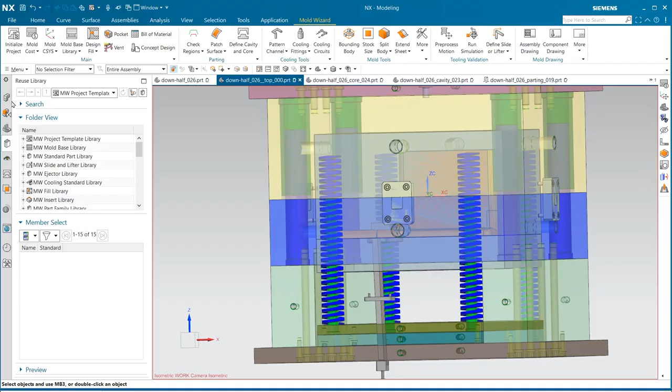In today's video, we'll show you how the June 2023 release of NX has made NX Mold Wizard even better. There's a range of new features and enhancements that will help molded part manufacturers automate and accelerate the mold design process. Mold Wizard is an NX add-on module that gives you a complete working environment for designing molds for injection molded plastic parts. It streamlines the entire mold development timeline, letting you automate time-consuming tasks and eliminate the repetition of standard processes.

Starting with the part file for the plastic product, you can validate the geometry for manufacturability and quickly make any necessary design changes before designing the mold itself. Modeling the mold's core and cavity geometry is quicker than ever thanks to extensive automation, and libraries of reusable standard parts make laying out the mold structure a breeze.

When it comes to manufacturing, associative design and full integration with Teamcenter mean a seamless transfer of data between teams. Whether you're 3D printing a prototype or multi-axis milling the final product, you can be sure that everyone's working from an up-to-date single source of truth.

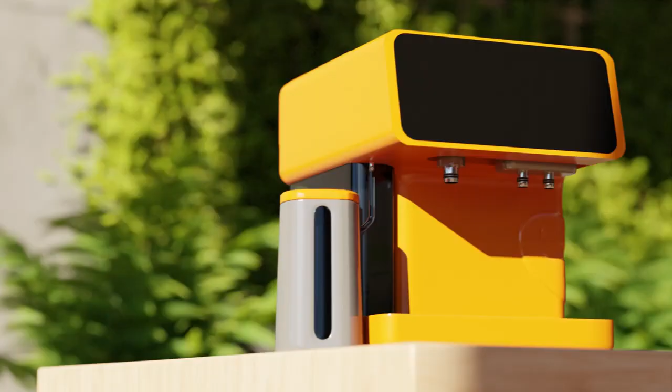This is the coffee machine that we showcased in the NX June 2023 premiere. The outer shell is formed of 4 parts that will be made from injection molded ABS.

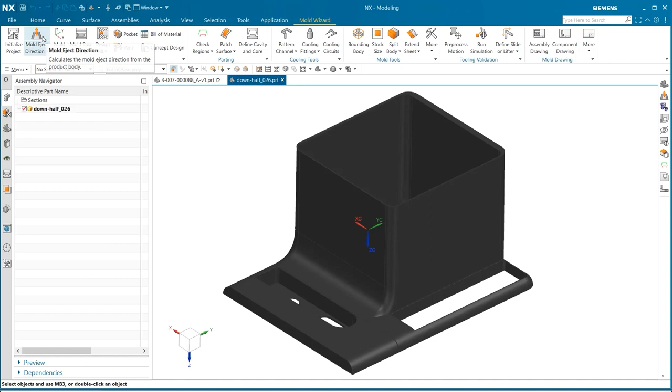The manufacturer is now in touch with a supplier to get the parts produced. That's where we'll pick up the story, as the supplier analyzes the part design, generates a cost quote, and designs the mold. The first step of analysis is to determine the mold eject direction. Simply select the body and adjust the orientation to get started.

If you toggle Perform Slope Analysis, the draft angles of different faces will show on the part for a visual check before we perform the command. Click OK and NX will automatically recommend the optimum eject direction for the mold. In this case, that's along the Z-axis, as shown by this blue line.

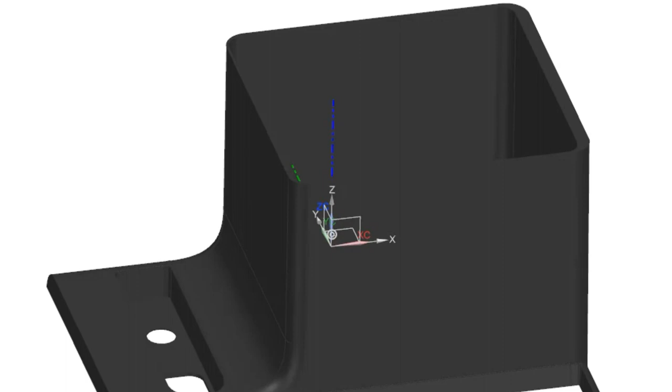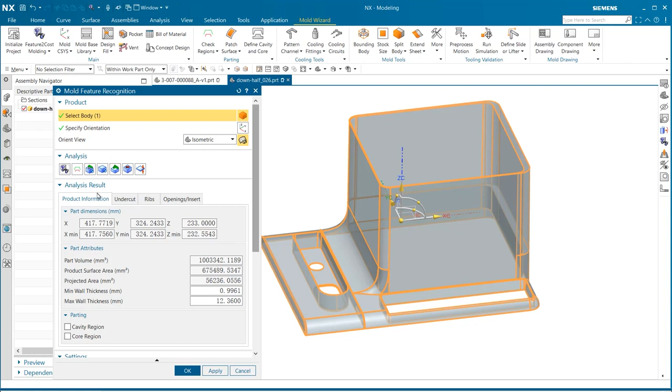Next, feature-to-cost modelling will automatically identify key information about the part and recognise important features that will affect mold cost. On the Product Information tab, we see figures such as the part dimensions, part volume, and minimum and maximum wall thickness. It will also analyse the part for any undercut areas, highlight them on the body, and show their dimensions. If necessary, you can quickly remove individual undercuts from the analysis.

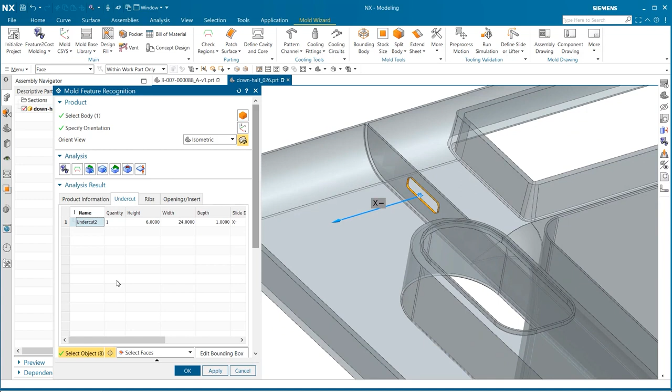We're not concerned about these two, but let's zoom in on the third. We'll need to account for this with a lifter or slider when designing the mold. You'll find any ribs listed in the Ribs tab, again with the necessary dimensions. This thin rib is likely to complicate manufacturing of the mold, perhaps needing electrical discharge machining. Lastly, feature-to-cost identifies openings that may require inserts during injection molding.

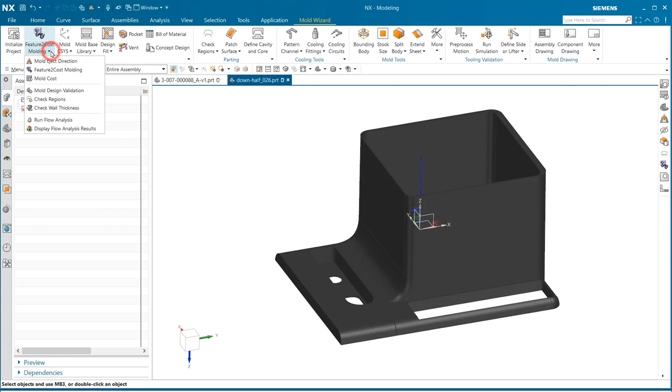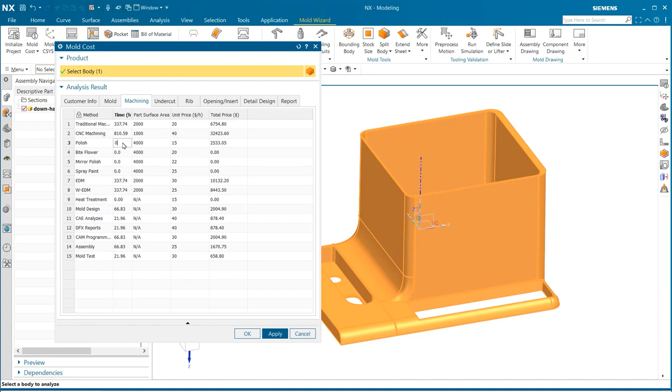With these features recognised, we're ready to estimate the mold cost and generate a report. There's a wide range of configurations that you can adjust based on your equipment, processes, and individual customer requirements. If we change the mold base material, the price updates accordingly. On the Machining tab, we see the costs of a variety of machining processes based on how long they'll take and a unit price for each. We won't be polishing this mold, so let's change the time value to 0. The total price will update automatically.

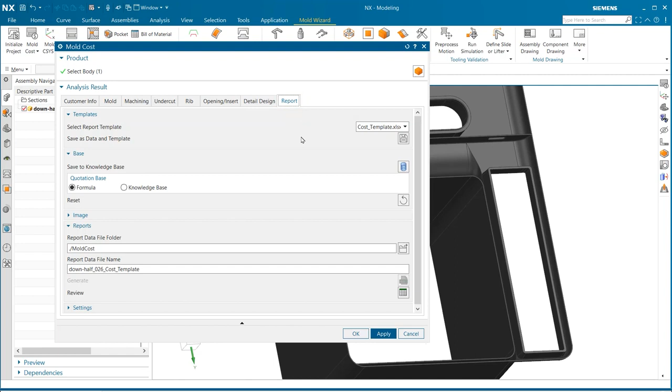All the undercuts, ribs, and openings that feature-to-cost has identified pull through into mold cost too. You can choose implementations and materials for each and see the prices update. Once your configurations are set up, it's time to generate a report. You can customize different templates for different stakeholders or use cases. Next, quickly choose and add reference images to the report direct from the NX viewport. No need to take screenshots and attach separate image files.

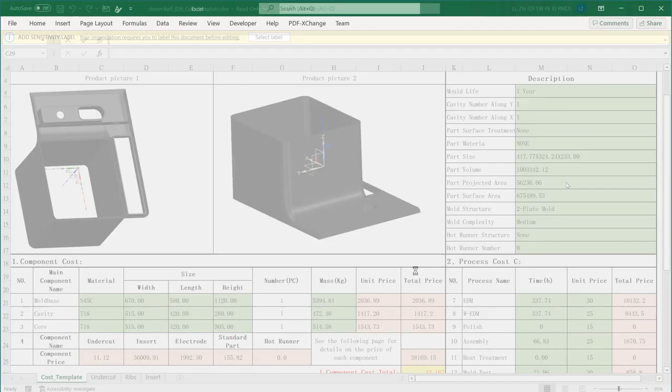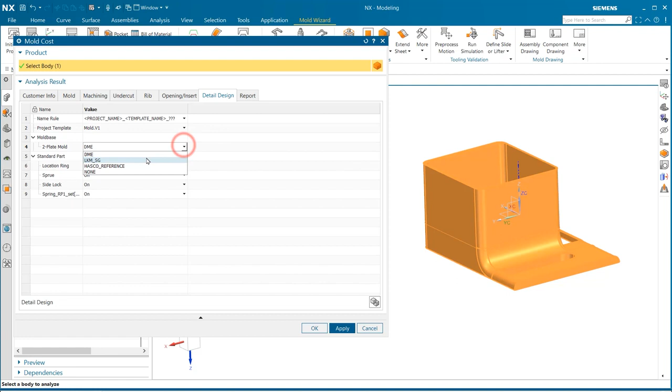Generate the report as an Excel file and click Review to see the output. This report includes a general part description, an itemized list of costs, and even tax information. With the analysis complete, we're ready to design the mold. Detail Design will automatically design a mold based on all the data from feature-to-cost and mold cost, including cooling, cores, cavities, undercut lifters, and other features. Just choose a project template, mold base, and standard parts, again, fully customizable, and click Apply to run the command.

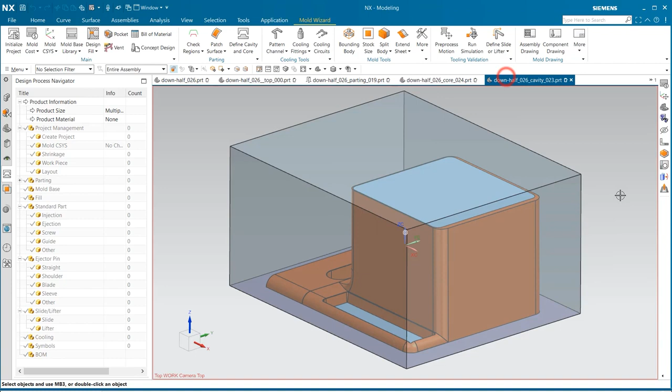You'll see NX speed through lots of different operations as it generates features based on the original part geometry and the specifications from mold cost. Once it's done, we can see that it has created separate part files for the core, the cavity, and the mold assembly. The mold assembly is fully featured with standard parts such as fasteners, guides, and inserts. NX draws these parts automatically from a standard part library which you can customize to match your own manufacturing operations. You can also quickly edit individual components if necessary.

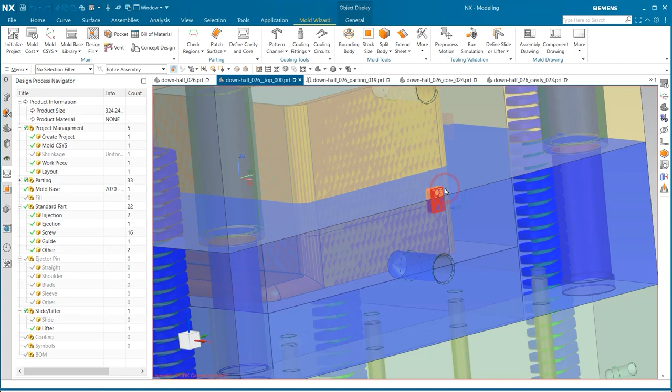Just select the relevant part, and Standard Part Manager will let you modify a range of values based on the options available in the library. There's even a helpful legend showing what each parameter controls. If we select the lifter for our undercut, there's a huge array of parameters to choose from, so we can get the geometry exactly right.

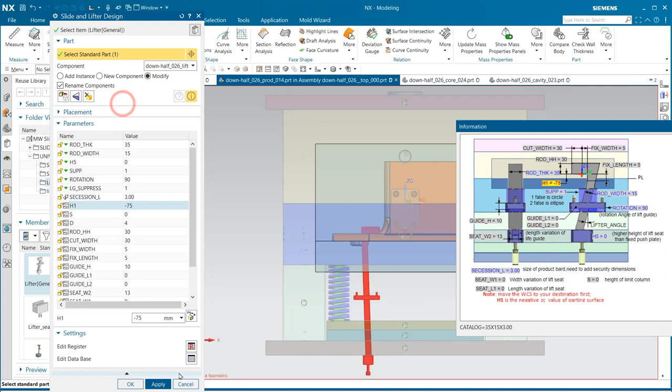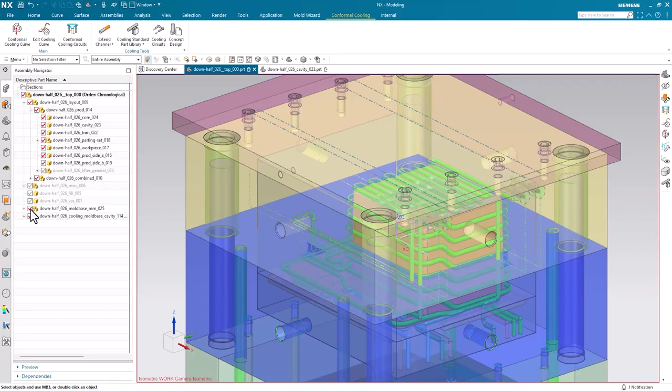There's also a range of more advanced mold design tools available. Let's take a look at Conformal Cooling Circuits, a feature with some new enhancements released in June 2023. While detailed design creates basic cooling features, you may need to design custom cooling to optimize performance for parts with complex geometry. A new enhancement is the option to use variable sections within the same cooling circuit. This lets you enhance performance at different points in the circuit and follow the geometry of the part as closely as possible. This circuit primarily uses a teardrop section, but we can use variable section to change it to circular between specified points.

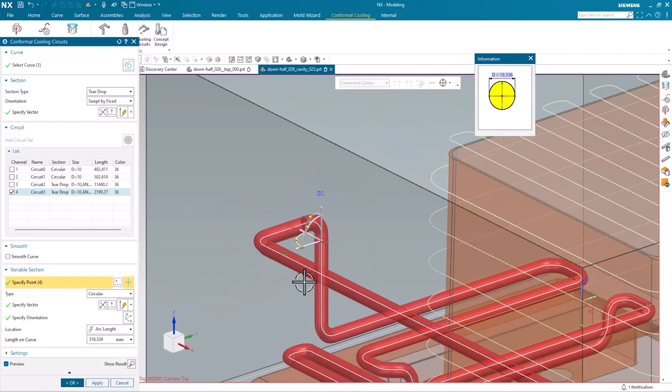Cooling channels now automatically update based on any changes to the original sketch curves or splines. You can also modify the 3D channel itself with a variety of edits such as move, bridge, or extend. Look out for another video showing conformal cooling circuits in greater detail soon.

So there we have it. We've used Mold Wizard to analyze a molded part design, calculate the cost of designing and manufacturing the mold, produce a mold cost report, automatically generate a detailed mold design, and create a conformal cooling circuit with variable sections. You can imagine how long it would have taken to do all that manually, without NX automating so much of the process for us. Mold Wizard has allowed the supplier to quote their customer faster while saving their engineers valuable time for more complicated tasks.